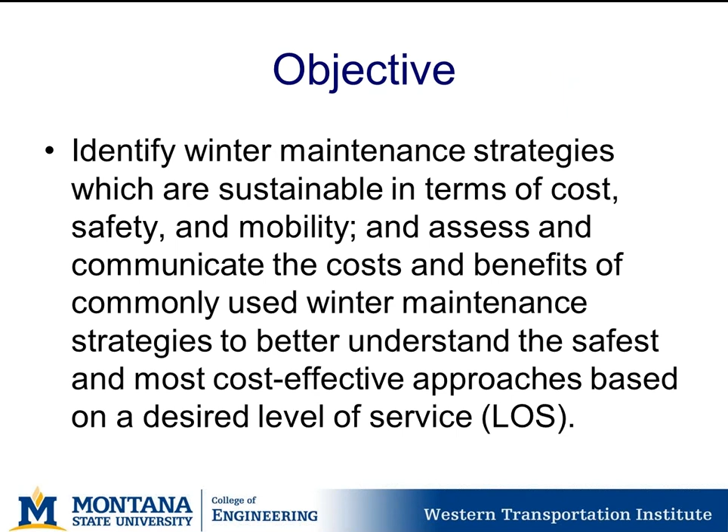To accomplish this, we used a literature review which focused on identifying the sustainable and commonly used winter maintenance strategies, and then the associated benefits, costs, safety, and level of service data that was available in the published domain. To fill in the identified data gaps and gaps in the research, we conducted the survey and follow-up interviews. Ultimately, 19 people were interviewed representing 12 different states within the U.S.

And from the literature review and survey and interviews, we were able to create the benefit cost matrices for basic, intermediate, and advanced strategies, which I'll explain shortly, and calculate associated benefit and cost ratios for each of these. And then we created the final report on which this webinar is based.

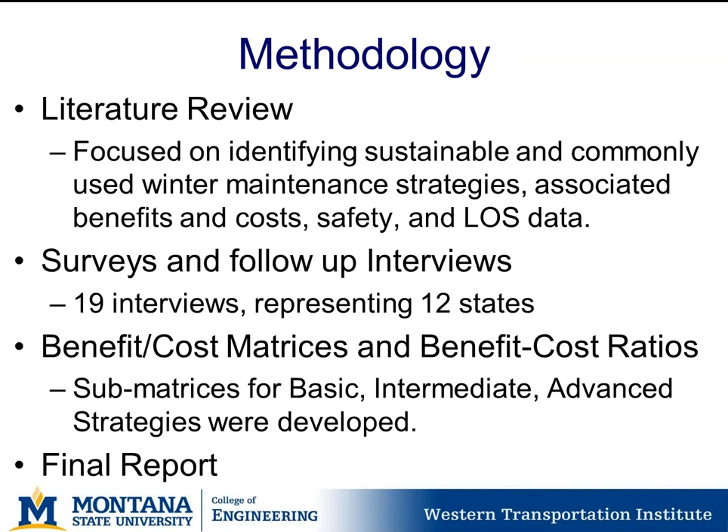So I mentioned in the previous slide there were 3 winter maintenance strategies that were considered for this project, and they're defined here. So the basic strategy for winter maintenance included plowing and the use of sanding and abrasives. The intermediate strategy included the basic strategy, so plowing and spot use of sanding and abrasives, as well as the use of rock salt and salt brine for anti-icing and de-icing.

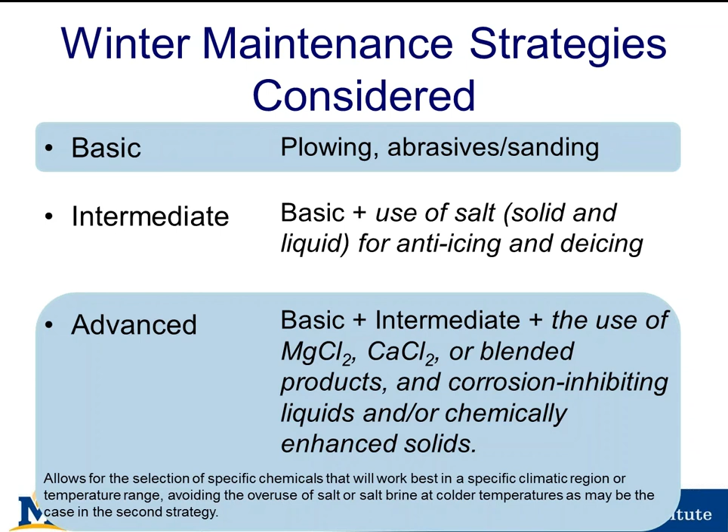And the third strategy that was selected included the basics, so plowing and spot use of abrasives, as well as the intermediate strategy of using rock salt and salt brine for anti-icing and de-icing, but also included the use of other products like mag chloride, calcium chloride, blended products, ag-based products, and the use of corrosion-inhibiting liquids or chemically enhanced solids. And really the focus of the advanced strategy was to allow for the selection of specific chemicals that work best in unique climates or temperature ranges to avoid the overuse of salt or salt brine at colder temperatures, which could occur if you only use the intermediate strategy.

So just some background on the project. Some of the components within each strategy, say, plowing or sanding, have much more information available than others. So sanding and abrasives and the use of road salt had quite a bit of information out there in the published domain on them. And this allowed for a very robust cost-benefit analysis for many of the components within the basic and intermediate strategies.

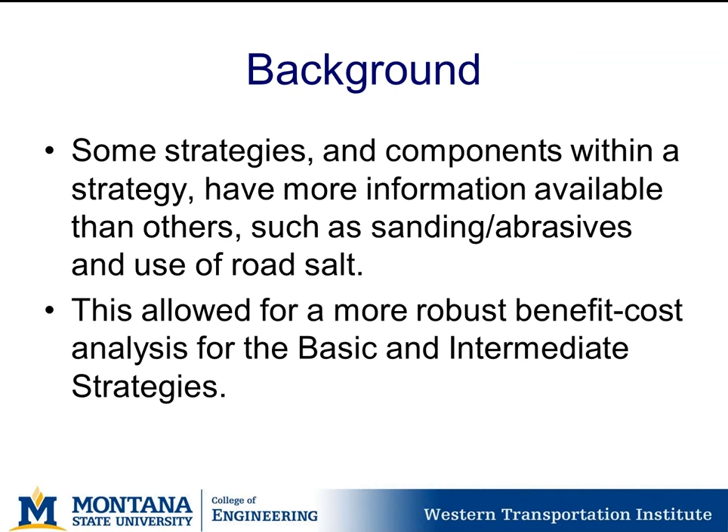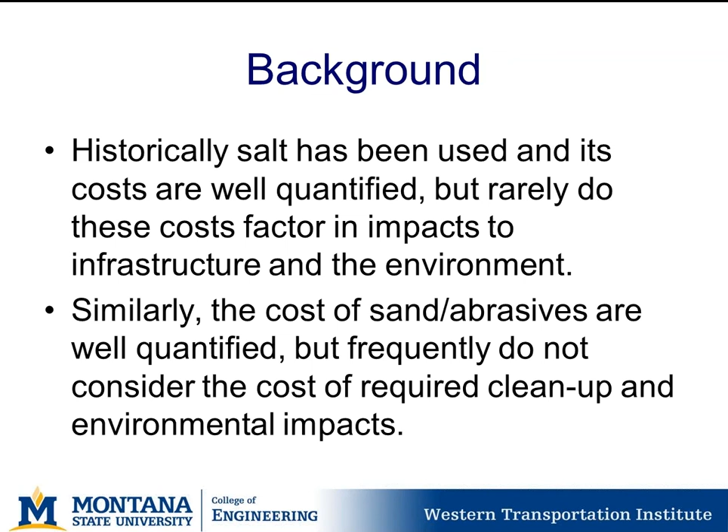While historically salt has been used and its costs are very well quantified, rarely do the costs factor in the impacts to infrastructure and the environment. And similarly, the cost of sand and abrasives are fairly well quantified. Most folks can report a cost per ton or how much it costs to put sand out on the road. But frequently, these costs do not consider the required cleanup and then the potential environmental impacts caused by the use of that product.

Interestingly, for snow plowing, which is the most commonly used strategy historically, not a lot of information was found or was well defined on the costs and benefits. And this may be due to the fact that it's really difficult to separate out the benefit of snow plowing if you're also putting sand out on the road or using rock salt. And so maybe a more strategic research project or data mining on just plowing operations is needed for that.

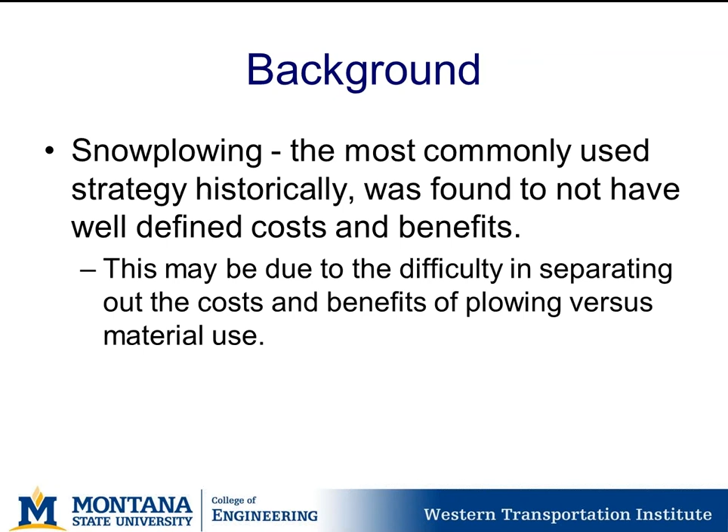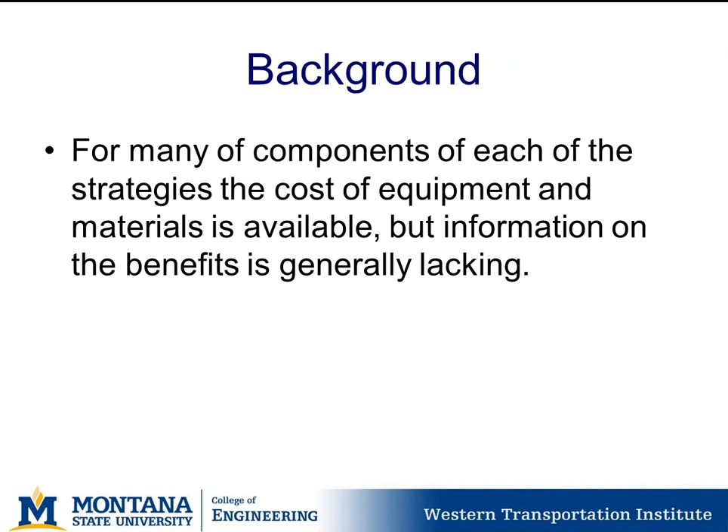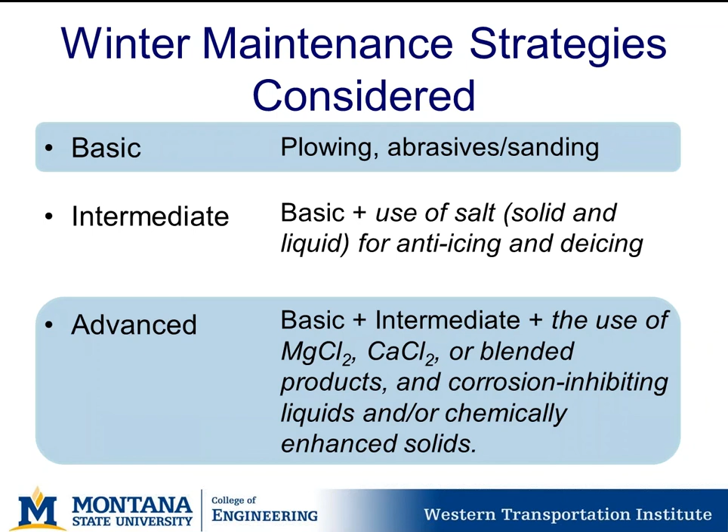So information that we didn't necessarily include in the cost-benefit matrices and cost-benefit ratio calculations included information on pre-wetting that I'll just highlight that was found from the literature review. So from the literature review, we found that pre-wetting of sand and abrasives with liquid chemicals or hot water has been shown to produce a 25% solid material savings. And pre-wetting rock salt with liquid chemicals, and that could be sodium chloride, mag chloride, or calcium chloride, has been shown to produce cost savings of 20 to 33%, which is pretty significant in the long run.

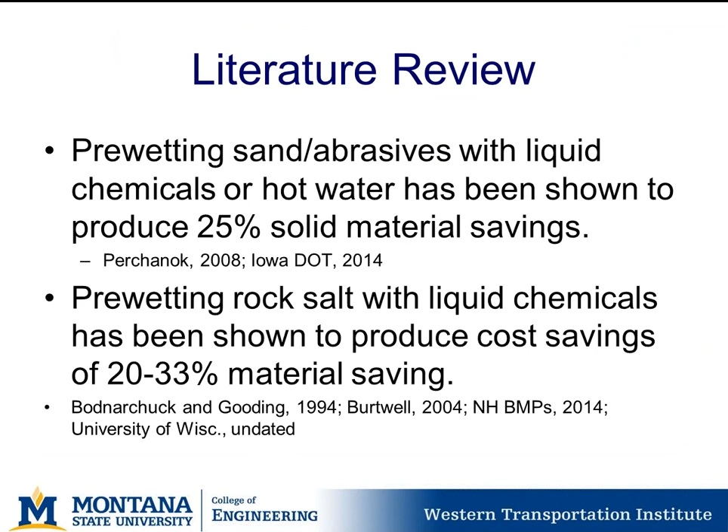One study in particular found that calcium chloride was 9 to 70% more effective at pre-wetting and outperformed mag chloride. But again, that's just one study. And so ultimately, the identified benefits of pre-wetting are that the product stays on the road during application, the product remains on the road longer following application, the product activates quicker than solid material alone when it's pre-wet, and application vehicles can travel at faster speeds during application when pre-wetting than when applying unpre-wet material.

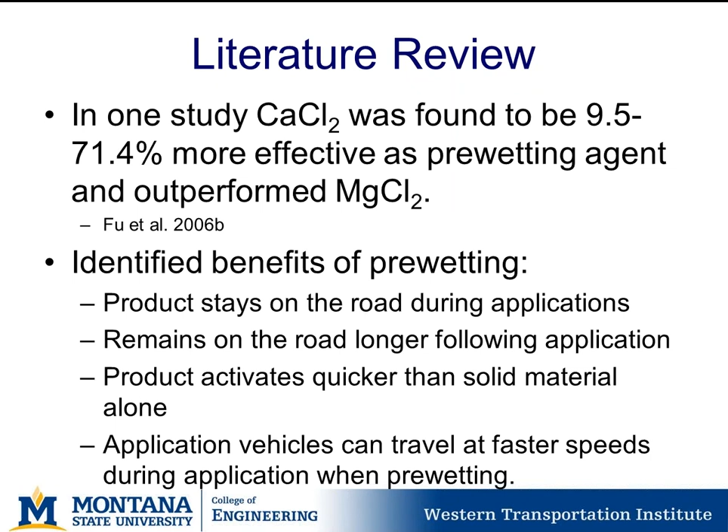So again, the information just presented is in the literature review, but wasn't necessarily folded into the cost-benefit matrices, and so I wanted to highlight some of the interesting findings. So getting into the survey results, the basic and intermediate strategies were found to be most commonly used by survey respondents. And again, the basic strategies are plowing and sanding, and the intermediate strategies are plowing, spot sanding, and the use of rock salt and salt brine for anti-icing and de-icing. Whereas the advanced strategies were less commonly used.

And this may be a reflection of the fact that the advanced strategies are less commonly used, or it could be an artifact of who responded to the survey, or it also may be an artifact of the limited response rate of the survey. Unfortunately for this project, because we are trying to capture so much data, the survey ended up being very long, and so I think it deterred a lot of people from participating in the survey and limited the response rate.

And as I say next, gathering cost data from survey respondents and interviewees was a challenge. And we're not sure if people didn't have the data, they didn't know where to find the data, or they didn't have the time to collect the data. But all of that added together presented a challenge for this project. So information gathered from the survey and interviews was used to populate the benefit cost matrices. And the benefit cost matrices are essentially summary tables of information and the calculated benefit cost ratios for the basic, intermediate, and advanced strategies.

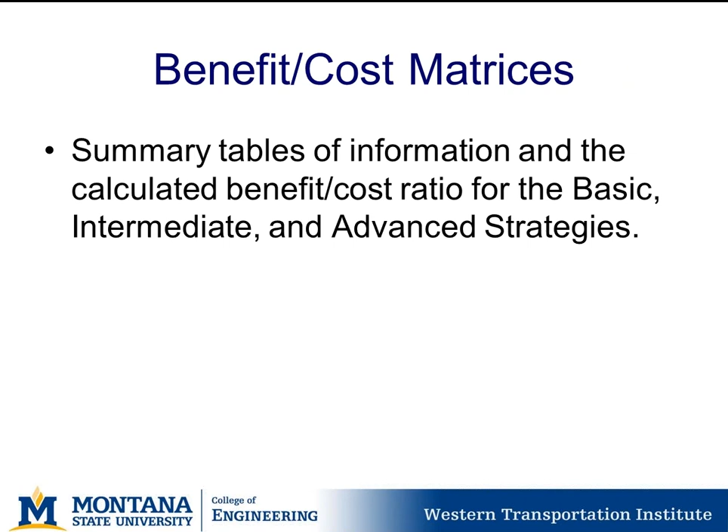So for each of the benefit cost matrices, information is reported on cost, benefit, effectiveness in achieving a level of service strategy. And what we did was, in the survey and interviews, we defined different level of service strategies, and those were broken out into 4 categories, including level of service A being bare pavement, which would be maybe a wet pavement, but a pavement that has extensive chemical use and plowing to achieve a near normal travel speed and driving conditions. A level of service B, which would be maybe a bare wheel path with some slush on the road that had plowing and some chemical application being made with the goal of the road being at near normal travel speeds.

Level of service C would be considered a fair condition road where wheel paths may or may not be visible. There may be packed snow on the road surface, and chemical use and plowing are performed, but travelability may be reduced. And the 4th was level of service D, which was poor condition roads where maintenance is being performed, but there is snowpack across the roadway and travelability is being diminished or reaching the point where it's not advisable. And as we view the cost-benefit matrices, you'll see how these are related to one another. Other information presented in the matrices include positive and negative impacts, pros and cons, respective performance, environmental impact, and then finally the calculated benefit cost ratio.

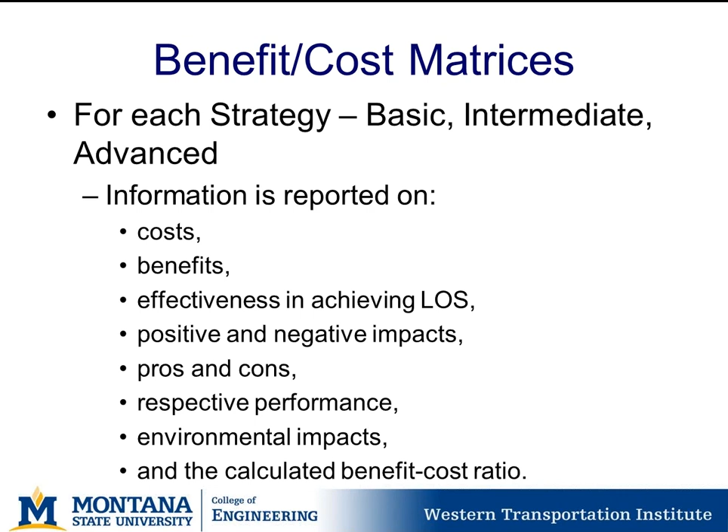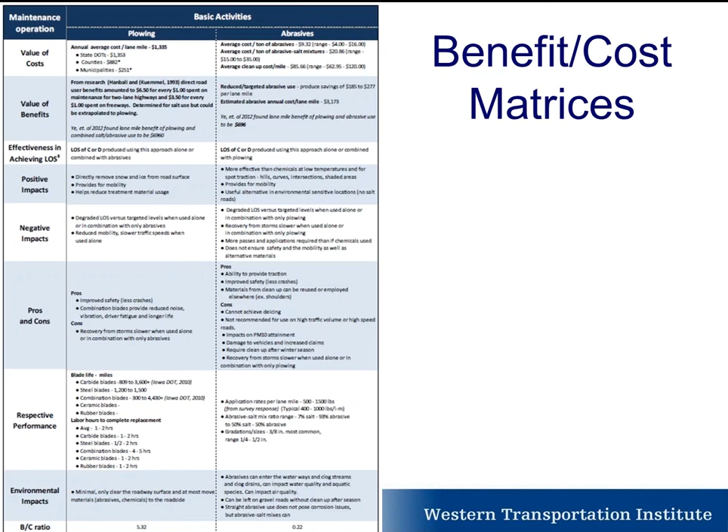So I know it's challenging to see, but here is an example of the basic benefit cost matrix. And you can see on the left-hand vertical column, we have all the information I just said was presented here. And for, again, the basic activities, we have plowing and we have abrasives. And because these are challenging to see, I'm just going to show you what they look like, and then we'll talk about what's in them in a minute.

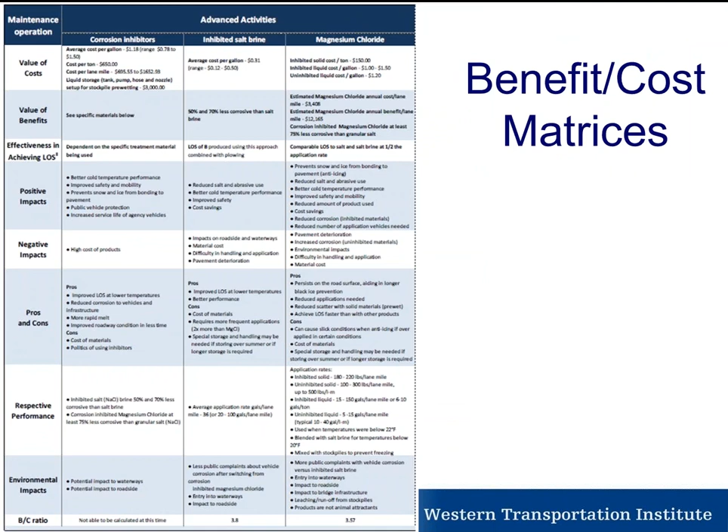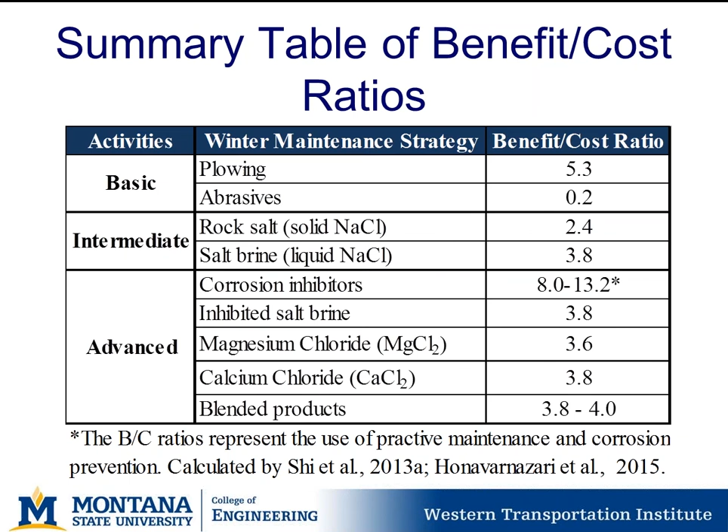So the benefit cost ratios were calculated based on the available data from the survey and interviews, and costs and benefits may vary for winter maintenance strategies based on local conditions and pricing. So again, our calculations were based on the data that we were able to capture, but we encourage folks to use this technique on their own data to calculate their own benefit cost ratios for each strategy.

The benefit cost ratios were calculated by dividing the present value benefit by the present value cost. And this is reported on a per lane mile basis. We needed to normalize the data so it was comparable. So we chose to normalize it using a per lane mile as the unit. Unfortunately, this limited some of the data we were able to use from the literature review. And so most of the data that we used was from the survey and interviews.

And for the benefit cost ratios, the total costs and benefits include those that were accrued by agencies. So that would be the cost of material upfront and the cost of the labor, whereas the benefits accrued by the agency and road user would be, say, reduced material application savings or improved safety.

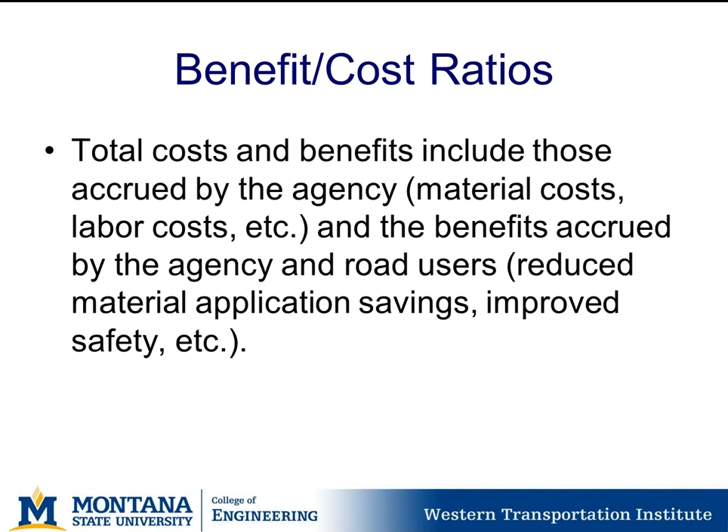So in conclusion, the literature identified information on the following: costs and benefits of common winter maintenance strategies, including plowing costs, benefits for plows and plow blade types, sanding and abrasives, the use of pre-wetting materials and techniques, the use of de-icing and anti-icing, as well as corrosion inhibitors and costs, and then environmental costs and benefits of various chemicals and strategies.

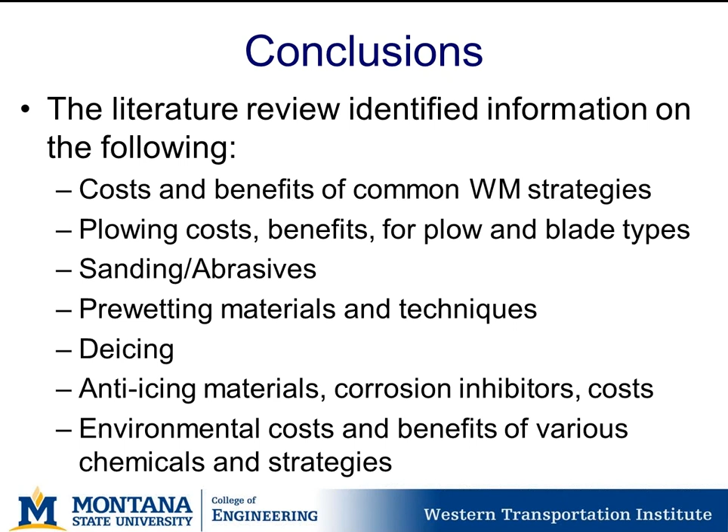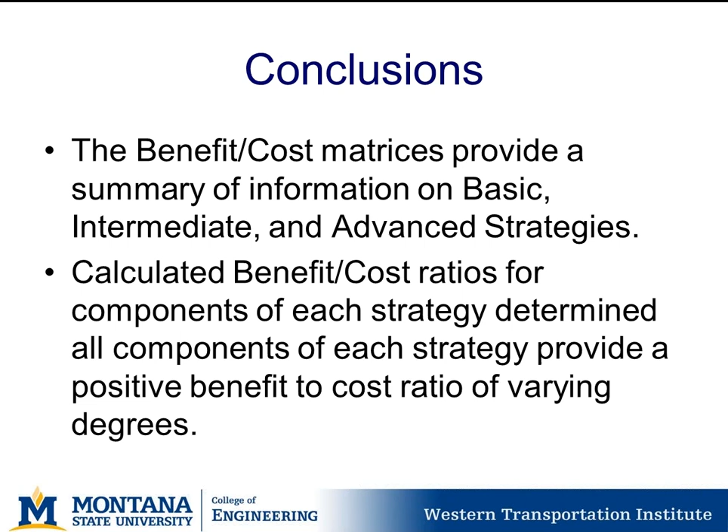The benefit cost matrices provide a summary of information on the basic, intermediate, and advanced strategies, and the calculated benefit cost ratios for the different components of each strategy determine that all the components of each strategy provide a positive benefit cost ratio, but to varying degrees. And ultimately, this project lays the foundation for the use of the benefit cost analysis tool in determining potentially new operational strategies for use by winter maintenance agencies.

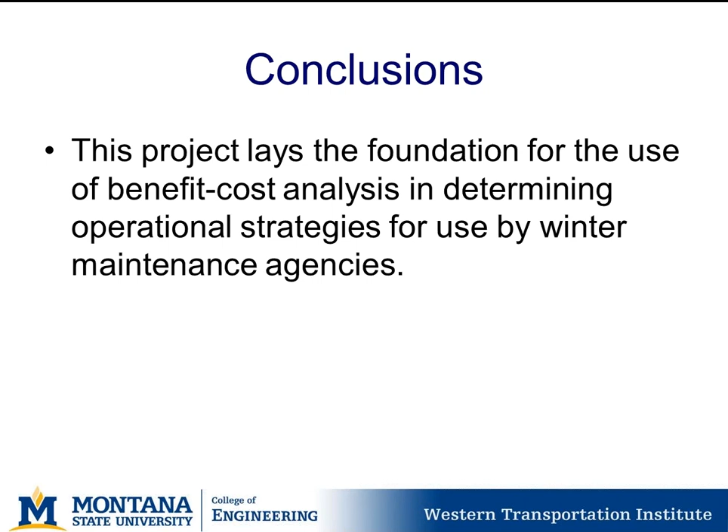And with all this, we were able to develop a few recommendations, which include develop an easy-to-use cost tracking tool for use by winter maintenance professionals. A lot of folks that we interviewed and who participated in the survey had cost tracking tools, but actually capturing specific data in the format they wanted was not as easy. Another recommendation is to conduct a cost analysis specific to corrosion inhibitors and agriculturally derived products, mostly because of the lack of information we were able to capture on these two.

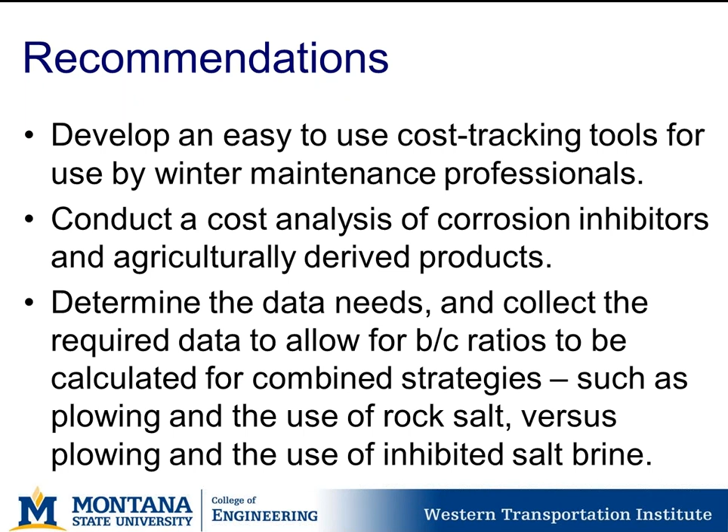And third, to determine cost or data needs and collect the required data to allow for benefit cost ratios to be calculated for combined strategies. And this was something we looked into, but were unable to do given the data that was collected for this project. But that would be, say, combining the use of plowing and application of rock salt, and then comparing the cost-benefit ratio of that to, say, plowing and the use of inhibited salt brine. And I think it can be done, but data would need to be collected in a different format.

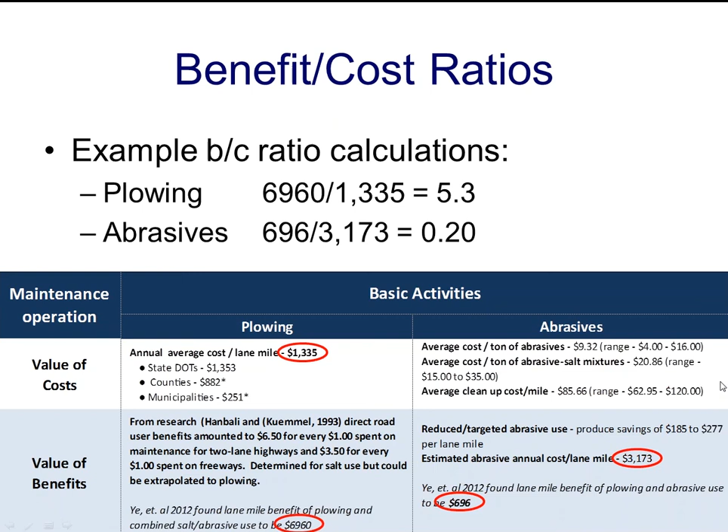So while we asked folks in the survey and interviews to define, based on these 4 level of service options, what they felt they could achieve, there was no correlation that we made between level of service guidelines by a specific state DOT and what was achieved. The goal was more to show that an intermediate activity such as using rock salt could achieve a level of service B if you were to employ that strategy.

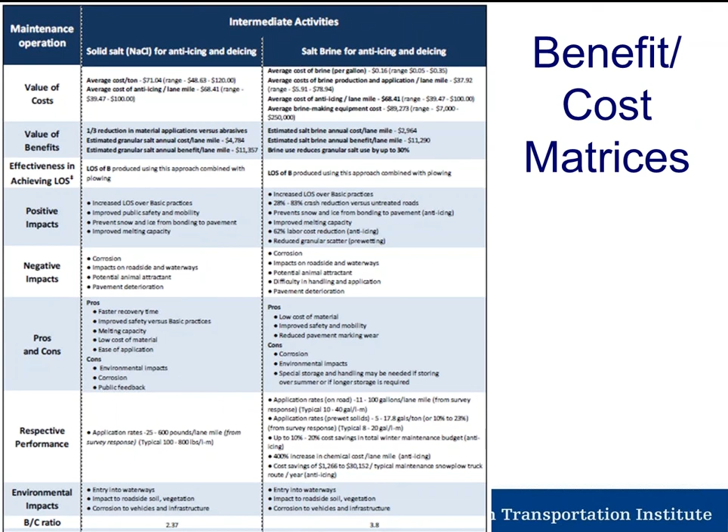Since no one chimed in with any questions, I'd just really quickly like to update everyone. I did have a meeting with Ron Wright yesterday. His review of the revised final report turned up a few typo issues as well as other comments, just how a few tables read and how specific strategies were defined in the report. And I'm working with our staff here to address those comments from Ron, and we plan to have that back as soon as we possibly can, hopefully in the next week, and then ready for publication. Ron said that he felt it was okay to not provide a second document on how we address the comments, if that's okay with everyone, but that the comments will be addressed and reviewed by the team. So that's all I have on that.

I do show one more question from Scott Lucas, and his question is, I'm very interested in calculating and figuring the cost of making salt brine. Does your spreadsheet address this calculation? No, it does not. Most of the calculations to determine the cost of making salt brine we got directly from the different state DOTs, but, Scott, I can put you in touch with the different DOTs that we got these numbers from, and you can contact them directly if that works for you.